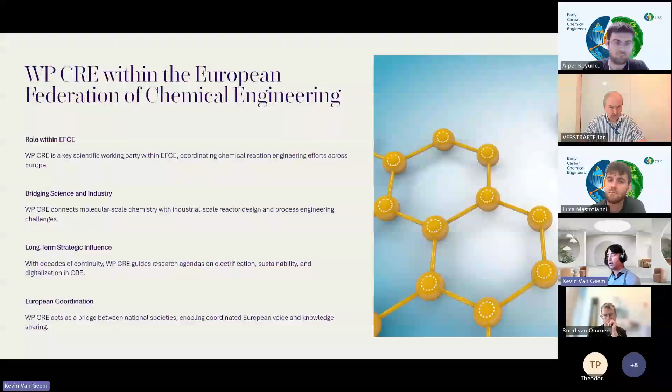Sustainability, electrification, and digitalization are, I think, the most novel topics that we are working on. This working party started originally from, I would say, the classical fossil-based industry, but then we have moved substantially. And we are basically also the bridge between the national societies. So we try to coordinate on a European level, and we try to share knowledge of the field of chemical engineering and specifically reaction engineering.

So what is our mission? We really want to advance chemical reaction science. This is both fundamental and applied research, and the important words there are kinetics, but also catalysis and reactors. Kinetics is really about reaction rates, catalysis allows to speed those up, and the reactor is then the unit that is used to create a certain conversion. And this is all on the process level. So again, very fundamental theoretical work, but also real things in practice. We also have members in our community who actually build large-scale units which are then implemented in industry.

Obviously, we want to develop our community and make sure that there's room for the excellent talent which is available in Europe, especially in the chemical engineering world. We try to encourage collaboration and also support early career researchers to build a strong connected community. Societal challenges are, of course, key. We have climate change, we have energy transition, and of course, if we look at what's happening now on the AI front, this also creates new opportunities, but also challenges, especially for our field.

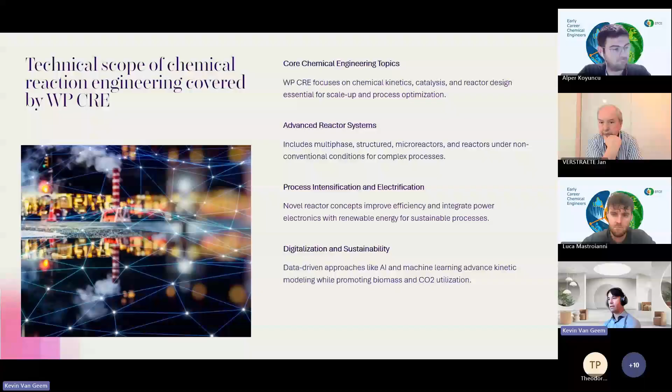If you look at our activities and platforms, our most important conferences are related to chemical reaction engineering: ISCRE and ESCRE. ISCRE is the international symposium. We had that about a week and a half ago, in this case in South Korea. ISCRE started in the 50s, and typically between 400 and 500 people are present. In the meeting in Seoul, we had about 600 people.

Next to ISCRE, we also have ESCRE, which is the European equivalent, and that conference will be organized next year in Milan. There we have a similar size, but really focusing on the European side, with about 400 people meeting at these events. And there, of course, we also meet as a working party to discuss the future of our working party, but also new topics. So networking is also quite important in these international meetings.

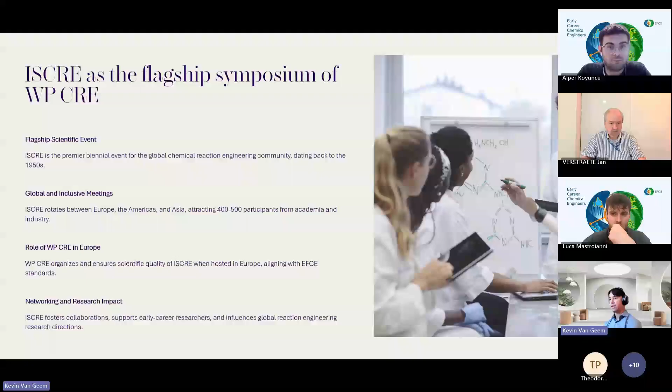Next to these conferences, we have, of course, the ECCE and the CHISA conferences, where the reaction engineering community is also largely present. And we are very active in the spotlight webinars. For the last, I think, five years, we have organized those together with the process intensification working party, with a focus on electrification, AI, and application of process intensification and reaction engineering. In this way, we foster cross-disciplinary advances in reaction engineering.

Obviously, we also have what we call business meetings. These happen once or twice per year, where all the working party members join and we discuss the agenda and the future of our working party. So clearly, we want to encourage young researchers to delve into our field.

We had a large presence in Seoul, but the field of reaction engineering is really, really crucial for this energy transition and for reducing our CO2 footprint. So in that respect, we try to explain to people why reaction engineering actually matters and what the big picture actually is, and why we are actually doing all this sometimes very fundamental work.

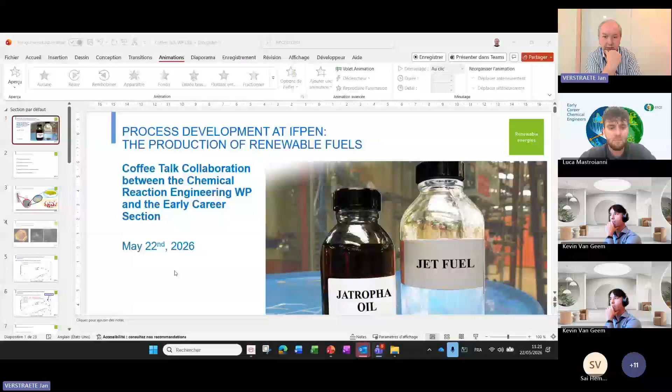There was a small thing that I wanted to add, and I thought Kevin was going to show something like that, where we see that reaction kinetics is a scientific area in which we combine many different techniques. We need very different analytical techniques to understand what is happening. We also need an idea of thermodynamics, of flow hydrodynamics in the reactor, and so on. So I wanted to illustrate that with an example of process development for the production of renewable fuels from vegetable oils.

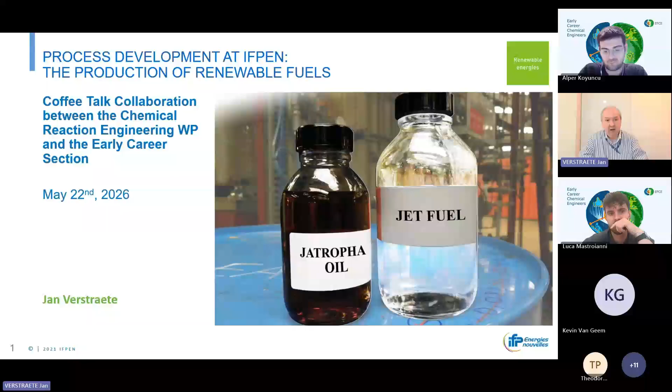So a few key steps that I was going to highlight: if we have a reactor engineering problem, a catalytic process in which we want to do some developments, here transforming these vegetable oils into biodiesel or renewable diesel, or sustainable aviation fuels, we have several things that we need to look at during the process development. First of all is, of course, the material science, where we have to develop high activity catalysts. And I'm going to illustrate each of these a little bit further on.

Then, of course, we need to know what is going in and what is going out. And so we very often need to use advanced analytical techniques. We also need to understand what is happening in the reactor. So we need to do experimental work trying to identify which molecules are being transformed and what we're going to see, and then implement all of this knowledge into a kinetic and reactor model. And the reactor model will also show that we need to look at some flow dynamics inside the reactor.

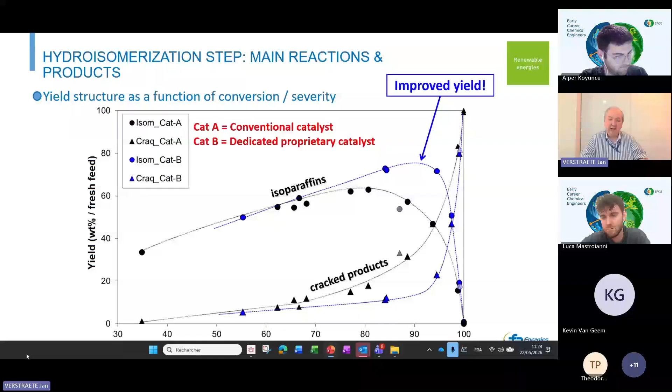Developing catalyst is, of course, quite intensive. You need to test and screen different things. And the idea is that you want to optimize all the way down to improve the yield of the product that you want to have at a given conversion level or a given severity.

Now, to look at the process development, one of the things that is important in scale-up is that if you have a small amount of a component that is not very important in your development phase, you will very often ignore it. And when you start to scale up, even if you have 1 weight% of some waste material, if you start to be working with hundreds of tons per hour, then these 1% become tons per hour. And so you have to do something with that. To do that, you need to identify the different components.

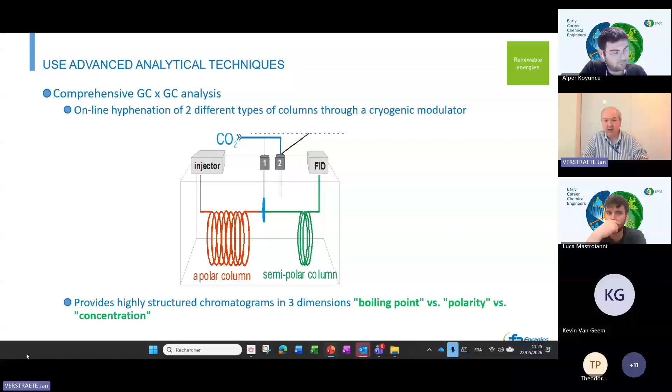One of the techniques that has helped us a lot over the last 10, 15 years is comprehensive GC by GC, where we have a separation in 3 dimensions: boiling point, polarity, and concentration. So most of you already know this. In the example that I'm looking at, the production of renewable diesel and sustainable aviation fuels, the feed is, of course, much more simple. From a wide perspective, it is mainly triglycerides. But as I said, minor components in these feeds can pose some problems when doing the scale-up.

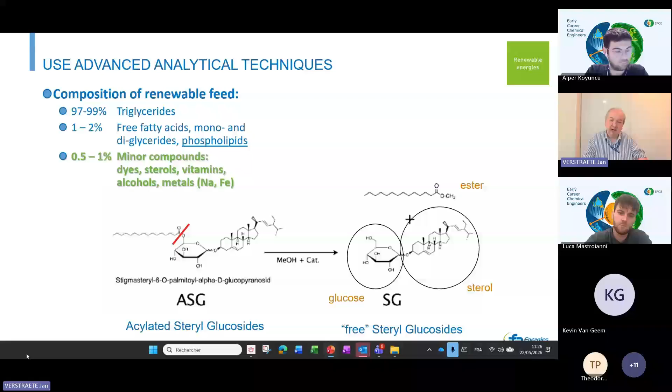So you need not only to look at the main components and do the experiments with model components, you also need to use real feeds which have some dyes, some sterols, some vitamins, some metals that can have some surprising effect on the reactor performance and on the catalyst lifetime when you are going to scale up.

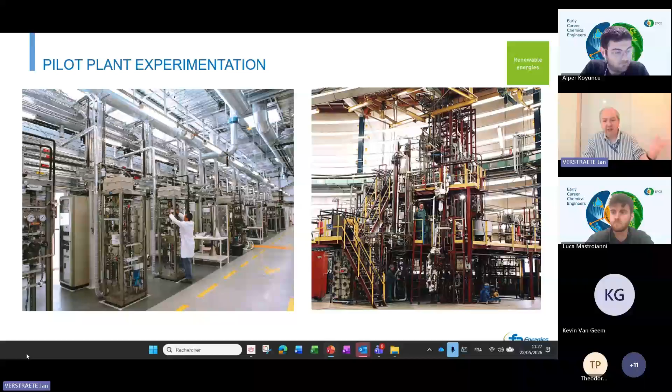Understanding the chemistry means that you need to do also some work on pilot plant experimentation, which means that you need not only lab scale equipment, but also higher scale equipment. This allows you to have sufficient amount of feed and effluent to measure the cold flow properties or the different properties that are important for the industrial application. So that's why you need larger scale equipment that allows you to get higher volumes and to measure properties that you cannot measure simply by chromatographic analysis or other lab analysis.

For the sake of time, I see that we have already spent quite some time. I'm going to skip this specific example.

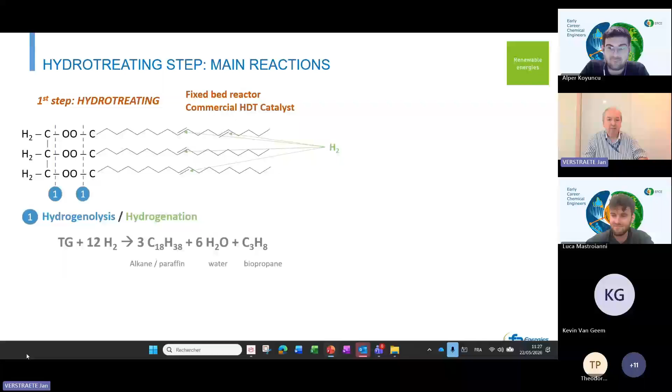We will look at the different catalytic steps. So the process in this transformation of vegetable oils into sustainable aviation fuels has two steps. The first step, in which we are going to remove the oxygen part and the glycerol part from these lipids to have some straight chain paraffins and some branched paraffins. But when you just remove the oxygen and you get these straight chain paraffins, you have a wax which is no longer a sustainable aviation fuel. It's no longer a liquid.

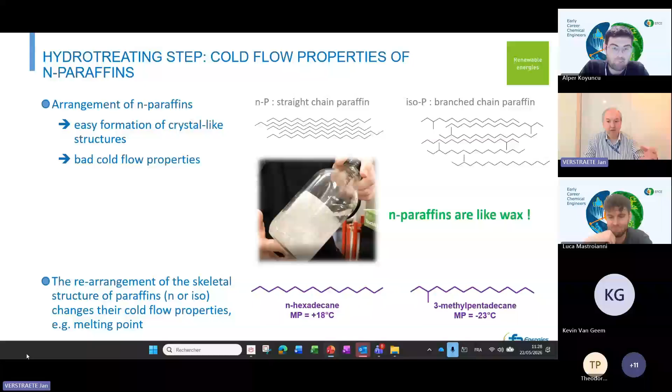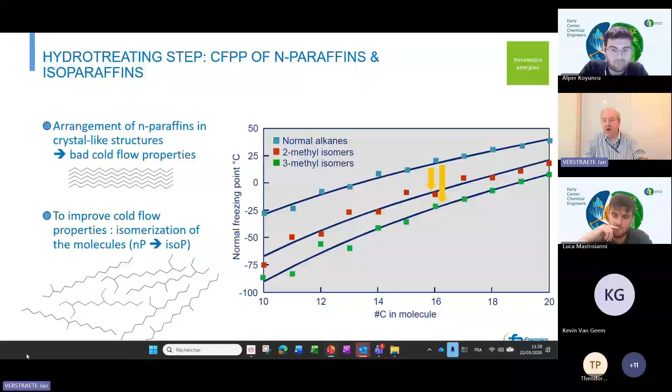And so the typical example we give is that normal hexadecane has a melting point of 18 degrees Celsius, at ambient temperature, while an isomerized paraffin with the same length, 3-methylpentadecane, has a melting point of minus 23 degrees Celsius. So just removing the oxygen, making the paraffins is not enough. You need to isomerize them in a second step. And so to improve the cold flow properties, you are going to isomerize the molecules more and more so that you can reduce the freezing point, the melting point, so that you can really use it in a jet fuel application.

Then, of course, once you have done enough experimental work, you need to unravel the kinetics that are happening, determine the rate coefficients, and generally implement this kinetic model into a reactor model. I've talked a little bit about the kinetic model, but of course that's not enough. Here we will have a three-phase system: you will have hydrogen in a gas phase, a liquid phase, and a solid phase catalyst.

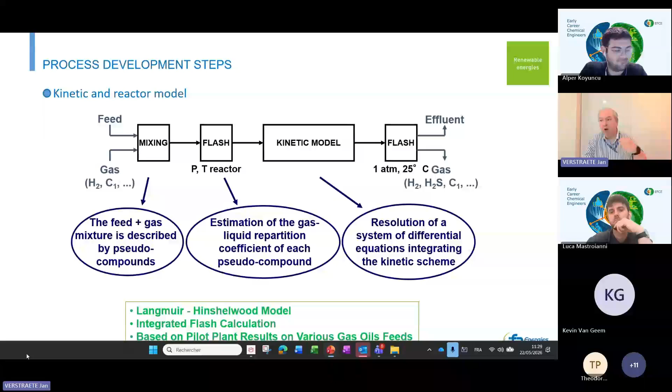So what we're going to do is develop a reactor model in which we have these hydrodynamics accounted for, looking at the gas-liquid equilibrium. And if the reactions are really too fast, we are also going to look at the transfer between the gas phase and the liquid phase. This model can then be used to look at scale-up, to optimize the reactor configuration, the operating conditions, and so on.

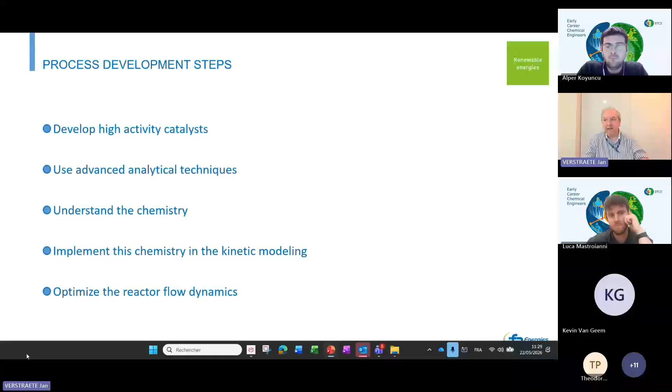One important point is also that we need to look at the flow inside the reactors. As I said, we have a three-phase system. And in a three-phase system, if you have a fixed bed reactor, you need to uniformly distribute both the liquid phase and the gas phase entering the reactor. To do this, we need to look at distribution of gas and liquid in a downflow reactor, and we have done extensive cold flow model testing, CFD modeling, and also get feedback from industrial units.

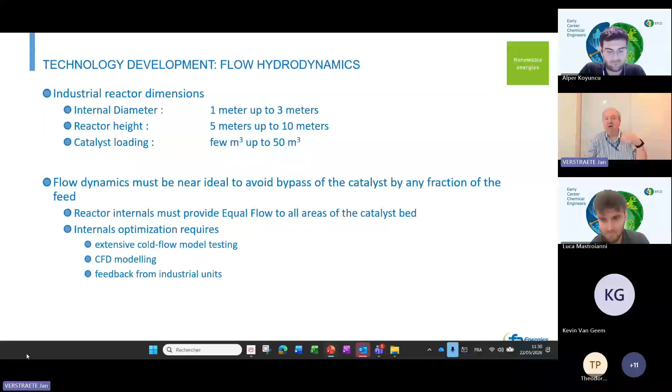An example of the work that we did here on flow hydrodynamics is using gamma ray tomography on a relatively large scale. We have a reactor that you can see over here, which is about 10 meters long and about 0.6 meters in internal diameter. We can fill this up with different types of catalysts or alumina supports. Then we have a gamma tomograph that can rotate around the reactor to take an image of the flow inside in less than 2 hours with a very high resolution. You can also move it vertically to look at how the distribution of gas and liquid evolves from the top to the bottom.

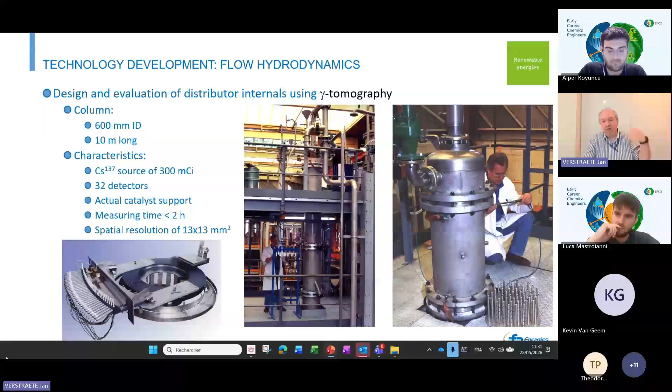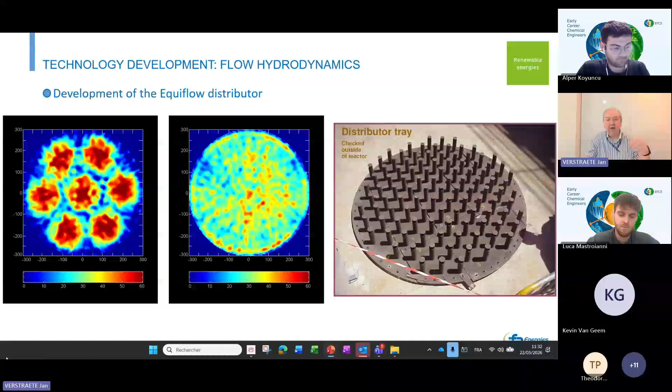On the right-hand side image, you have an optimized distributor, and this gives you a much more uniform flow, distributing almost perfectly the gas and the liquid over the entire cross-section. So that's also a very important step in scale-up, where you need to look not only at what's happening on the active site, but also at what's happening with the flow inside your reactor.

And so that's about the end of my industrial presentation of what we do in catalyst development. In this example, we talked about producing sustainable aviation fuels and renewable diesel, starting from edible oils, waste, used cooking oil, animal fats, tall oils. In the first step, we remove the oxygen and hydrotreat the double bonds, and therefore obtain mainly normal paraffins. But these are not usable because they are solid at ambient conditions. Then we isomerize these into isoparaffins to get either renewable diesel or sustainable aviation fuels. And with that, I would like to thank you for your attention.

Thank you very much for these very nice talks. They were indeed very interesting, and I'm particularly impressed. It was nice that you also highlighted the multidisciplinary nature of reaction engineering, material science, analytics, fluid dynamics. They're all very important, and really thank you for highlighting that.

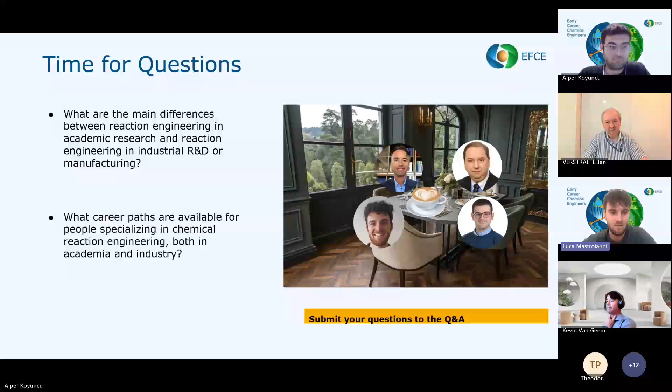Okay, thank you very much for your honest opinions. I think they are very useful for me and for all the audience. So now I will give the voice to Alper. He can continue with the Q&A.

So we have just one question left. Let me ask this: where AI can bring substantial improvements in chemical reaction engineering, what are the threats, for both of you? Yeah, if I look at AI, you obviously think about speed-up, but there's also the risk of going to black box models. And the field of reaction engineering is in the end where we really try to avoid black box models. Reaction engineering is all about getting good data, and then we can develop very detailed models.

For me, AI can help, for example, in CFD simulations, to speed up these simulations substantially. But because the models that we develop are typically quite advanced, the benefit of AI on precision, I think, is limited in our field. But it can help us to maybe come up with new technologies. If you have to create programs or software, doing that now with AI, everything goes so much faster.